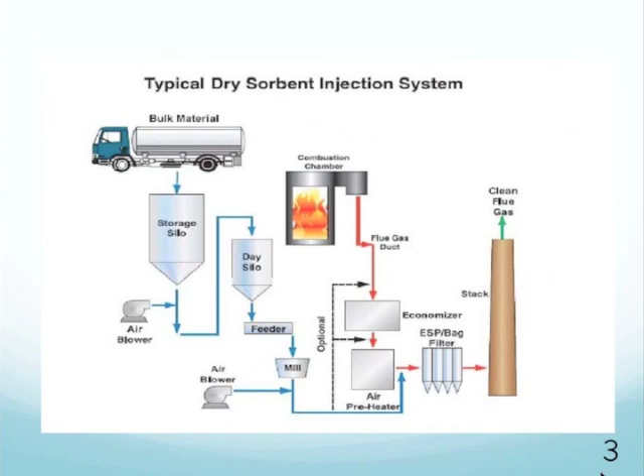As we will discuss later, you could inject the sorbent at one of several locations. Typically it is after the economizer, but it could be before the economizer, after the economizer, or after the air preheater, and before the particulate control device, which in this case is shown as an ESP or a bag filter or bag house. After everything, the clean gases go up the stack.

So here we want to show a little more detail, mainly making the point that the injection system can be fairly sophisticated, and would need to be fairly sophisticated depending on the sorbent that one is thinking of injecting.

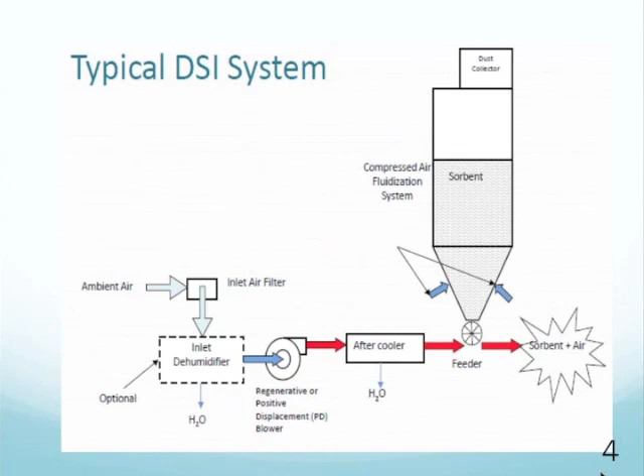You might need air conditioning of some sort. I show an inlet dehumidifier, for example, to take care of the moisture that may be in the ambient air, and you have to properly account for not introducing too much moisture for reasons we'll discuss in a minute. You might need to control the temperature also of the injecting gas and the injectant gas before it goes into the actual point of injection. We'll get into some of these details as to why they're important in a little bit.

I'll give you an example here. If you want to remove 1 pound of sulfur dioxide from the gas, and you're using Trona, you need about 2.4 pounds of Trona to theoretically remove the sulfur dioxide, assuming the chemical reactions are all complete and assuming you have perfect mixing and all the reactions you would like to occur. So you need about 2.4 pounds for each pound of sulfur dioxide, and that would correspond to a normalized stoichiometric ratio of 1.

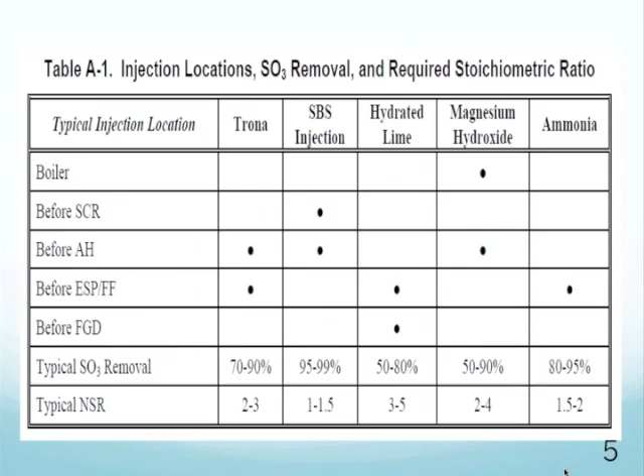So if you want to get the higher efficiencies of sulfur dioxide removal, you cannot get that with simply adding the theoretical amount. You need to do more than that, you need excess sorbent. So when you're talking about an NSR of 2 to 3, or 1, or 1.5, or some other multiple, it simply means that many times greater than the theoretical amount I just mentioned. The amount of sorbent you need to inject is going to be a function of variables we'll discuss. But you'll see the term NSR, and I just wanted to spend a few minutes clarifying what that term really means in this context.

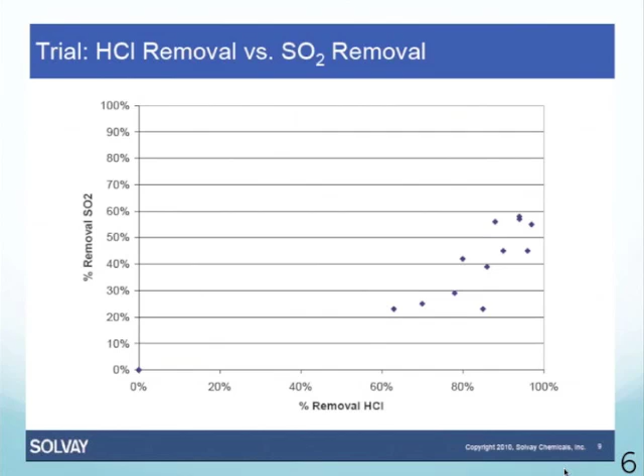Here I wanted to show a historical slide. I mentioned that the technology, at least in historical terms, was required for or used for HCl, and I wanted to show this cross chart of HCl removal versus SO2 removal, because generally these technologies do better on acid gases and SO3 than they do on SO2. What this chart shows is, while you could get 60, 70, 80, 90, close to 100%, or 99%, or 98% removal of HCl, you have a harder time for the same amount of Trona getting those sorts of high levels of SO2 removal. So SO2 removal will lag for a number of reasons, including how the chemistry works, how the mixing works, how the contact time works, how the residence time works, and so on.

I'm not going to spend much detail on slides like this, except to show that if you're considering the grand scheme of SO2 removal and you've already ruled out things like dry or wet scrubbers, and you're seriously considering dry sorbent injection, there are decision trees you have to navigate as to what type of sorbent, and later we'll see how that sorbent should be processed. For our purposes, we're talking about SO2 removal applications that exceed 50%, whether to meet EPA's MATS rule or to deal with reducing SO2 for other purposes like National Ambient Air Quality Standards.

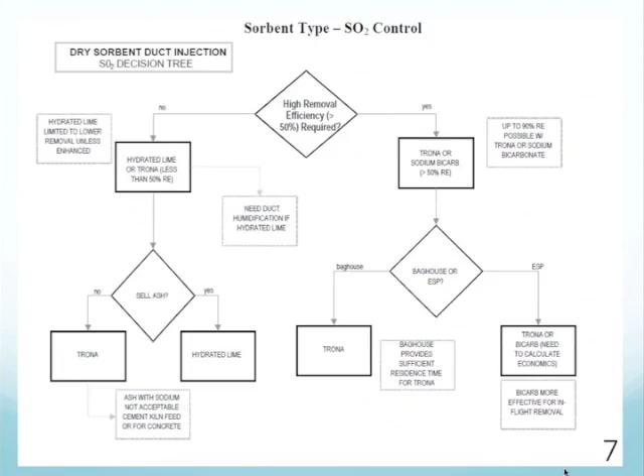If you look at that, calcium-based injectants such as hydrated lime are not favored. Instead, you want sodium-based injectants like Trona or sodium bicarbonate — that was the SBS in the previous table. So I'm going to focus this presentation on Trona as an example. That happens to be one of the more common sorbents under consideration for a number of reasons, including that it is cheaper than SBS. We'll talk about cost a little later.

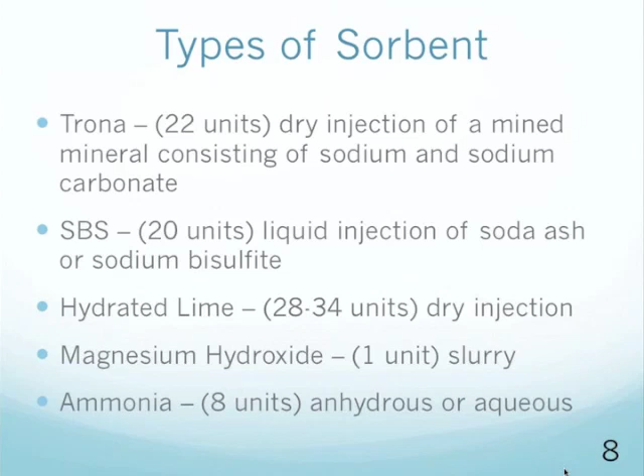On Trona, the actual name is sodium sesquicarbonate, and you can see the chemical formula there. It's a combination of sodium carbonate and bicarbonate, and it's hydrated. It is a naturally occurring mineral, and in the U.S. we have large deposits. There's some in California, actually near a place called Trona, near Bakersfield, but the bulk of the deposit is in the Green River Basin in Wyoming, coincidentally not too far from the Powder River Basin where we get a lot of our low sulfur coal.

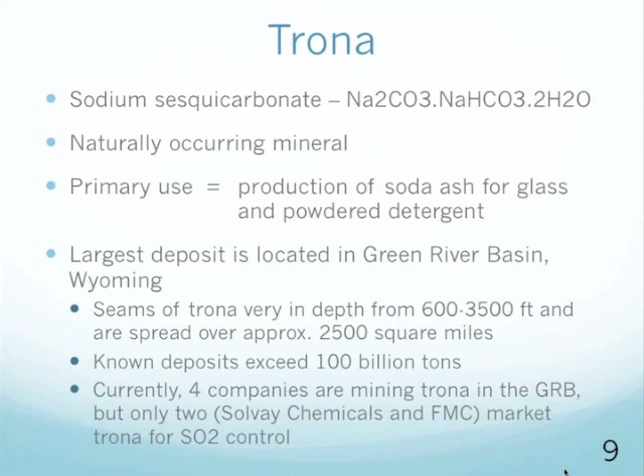It's a very large geologic formation with known deposits exceeding 100 billion tons of Trona. Various companies, four in particular, are mining it. Let's go to the next slide to get an idea of the location.

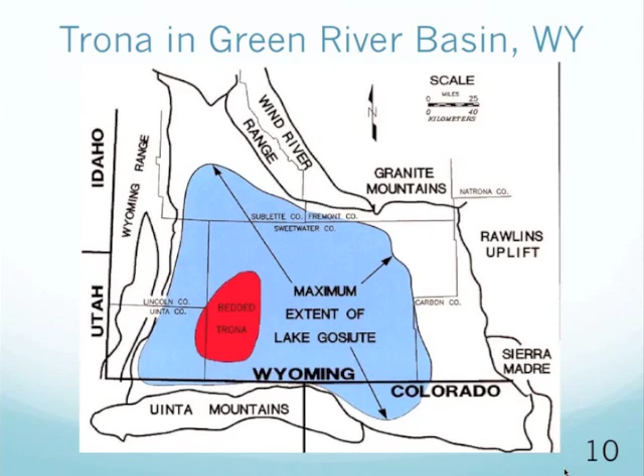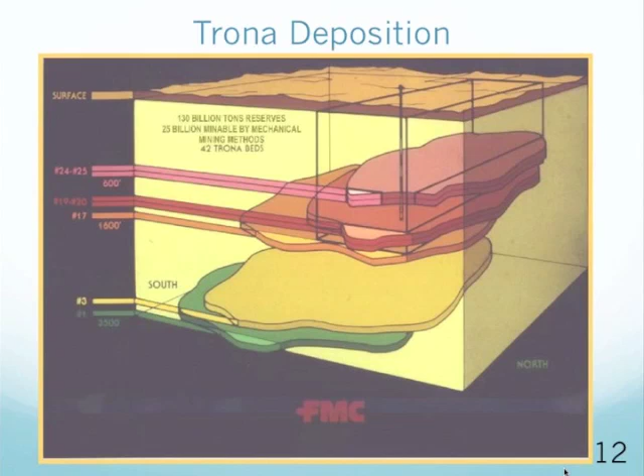I don't want to spend a lot of time on the detailed chemistry except to note a few things. The sodium-based reactions are our focus right now. There's a parallel set of calcium reactions I note here in case somebody selects hydrated lime or other sorbents I mentioned previously. But with the sodium-based reactions, you're essentially doing the same thing — substituting to create sulfates by displacing the carbonates in your injected sorbent.

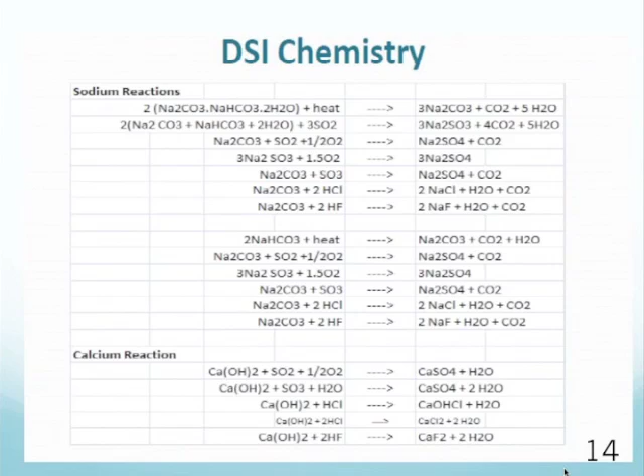If you look to the right-hand side, you'll see that what started out as sodium carbonate or sodium bicarbonate essentially ends up as sodium sulfate, SO4. One key thing to remember, a byproduct of this process as with many other desulfurization processes, is that you will produce carbon dioxide gas — you can see CO2 as a product on the right-hand side in many cases. When you inject the dry sorbent like Trona or SBC, or some combination of the two, you will produce CO2, over and above the amount normally produced in the combustion process if you're burning coal.

The Trona that is received is transported by rail from the Green River Basin, typically in 100-ton rail cars, to the point of application. You need a size that can be blown or injected into these various locations I spoke about earlier, and the sizing affects the utilization of the reagent.

The finer you grind the Trona particles, the better utilization you get, and in some ways you will lower that NSR ratio, meaning you need less excess quantity of the reagent than if you did not size it properly. So most Trona is sized or milled down to smaller particle sizes at the plant site, because that improves utilization, and using less of it reduces waste.

But there is a cost to further milling, and there is a trade-off. We're talking about sizes anywhere from 10, 15, 20, 25, up to 35 microns on average for the median particle size that gets injected and carried by conditioned air into the exhaust gas stream.

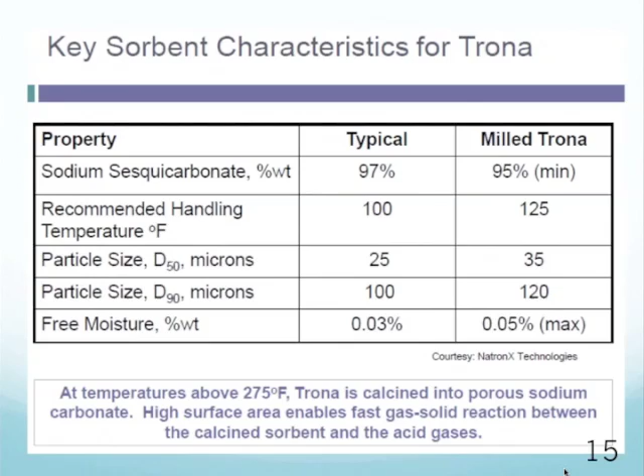Now I want to spend a few minutes on the location of injection in more detail. The location depends in some ways on temperature, which is a function of the sorbent. With Trona, it becomes less effective once the temperature falls below a certain threshold, roughly 290 to 300 degrees Fahrenheit. So the point of injection should be at temperatures significantly greater than that, because otherwise the chemical reactions won't be as effective and you won't get much utilization of the injected Trona.

The temperature profile of the exhaust gases as they leave the boiler and economizer, go to the air preheater, and then move on to the baghouse, is important in deciding where to do the injection. You must inject before the particulate control device -- you cannot do it after unless you have a secondary collector. If you have one main particulate collection device, injection has to happen before it, because the Trona particles that have absorbed SO2 must be captured as part of the baghouse dust.

The popular locations are either the economizer outlet, which is the same as the air preheater inlet, or after the air preheater outlet and before the particulate control device. In less frequent cases, it's also injected before the economizer.

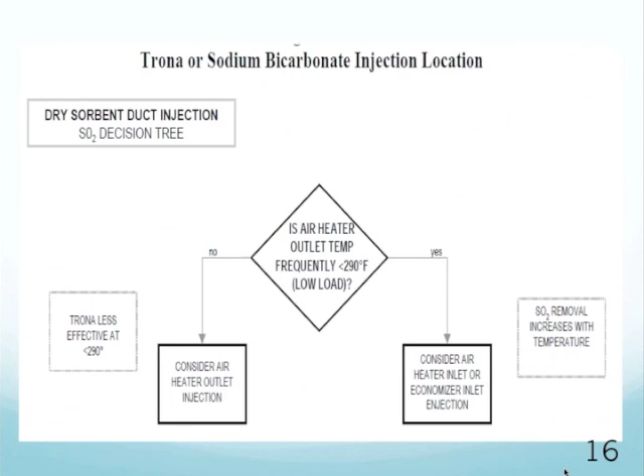Now, talking about milling, or essentially size reduction -- you typically have a grinder, pulverizer, or milling machine at the site where the received Trona is ground into the appropriate size and then put back into the day hopper or into the injector directly. Some of this depends on how big the facility is, because the cost differential and utilization economics depend on the scale.

A rule of thumb is 3,000 pounds an hour -- a fairly significant injection rate. At that point it might be more effective to take on the capital costs of milling machines and the operating costs for milling, to justify the improved utilization and therefore the lesser quantities you'd have to handle.

But if you have a large installation -- and by large I mean extremely large, like those of you who saw the announcement about AEP's Rockport facility, a 2-unit facility with 1,300 megawatts at each unit -- that's probably the biggest installation DSI has been slated for, and we can talk more about that in Q&A. But you will almost certainly consider milling if you're going to use Trona.

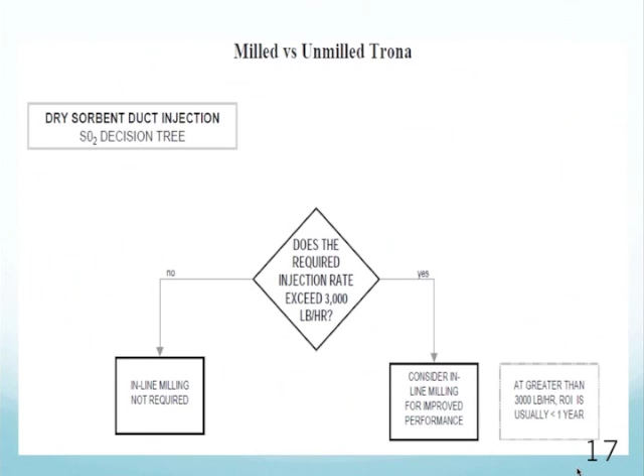What happens when you inject these Trona particles into the hot gas stream? What happens is they essentially bubble up. The surface area increases, and you get this popcorn effect.

And that's what is shown here, is this increase in surface area as a function of temperature. You want that surface area increase because that is what helps provide the surface area for the SO2 to adsorb and then react with for the chemistry to be effective.

So this shows that to get effective maximum utilization, you really want to be in the 400 to 600 degree temperature range, because anything below that, at 100, 200, 300 degrees, the surface areas are not very high. And if you get to very high temperature on the other side, the Trona essentially sinters and chemically transforms, and you lose utilization.

So there is a sort of sweet spot in the temperature window where you want the injection, and that is really what drives that injection decision, in addition to the practical considerations of collecting it before the bag house and so on. I wanted to give you this to give you a better understanding of why the injection point is typically where it's at. We can go to the next slide.

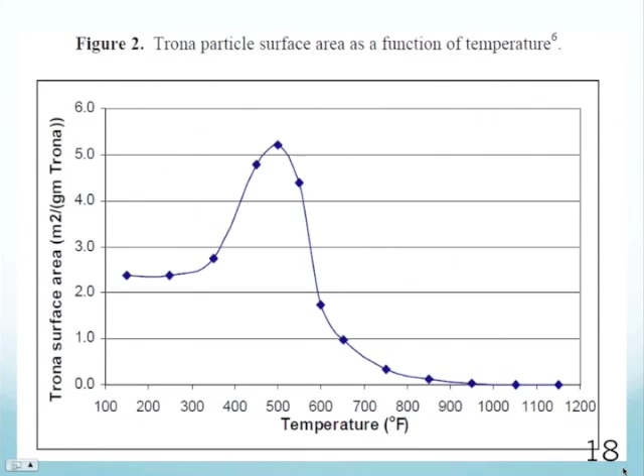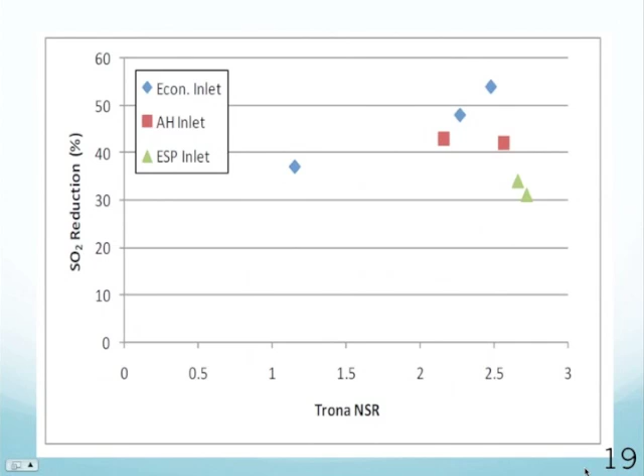We will see that in specific installations and under specific conditions, you can get higher SO2 removals. In other words, 60% is not the maximum by any means, but it does take a lot of Trona, a lot of sorbent, and we'll see that in subsequent slides. Let's go to the next one.

This is another set of trials, and here we see that at the very high end, at an NSR ratio of 3.5 - that is 3.5 times the theoretical - if you remember the 2.4 number I mentioned, that's 2.4 pounds for every pound of SO2 removed, 3.5 times that works out to close to 10 pounds of Trona for every pound of SO2 you're removing.

And of course, at the right injection point, you're now getting a reduction, in this set of trials, that is greater than 85, close to 90%, or even in the mid 90%. But that is unusual - that is a lot of Trona and a lot of material handling. You see the sensitivity of the NSR ratio as well as the injection point and injection strategy in terms of removal efficiency.

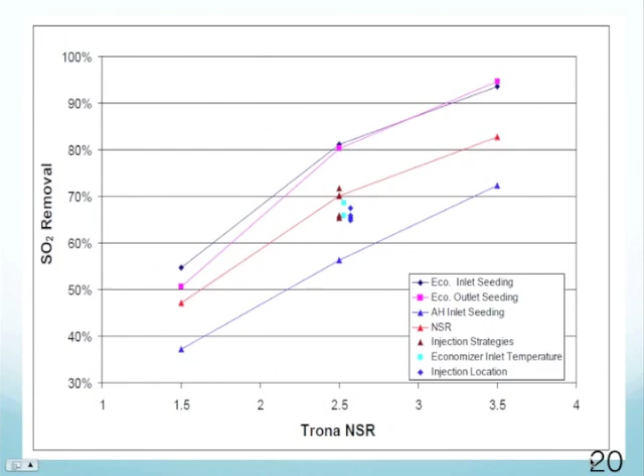So you can have a wide range, and the operating parameters and the cost will really dictate what you can achieve. You will never get the 98 or 99% efficiencies that you might get with a wet scrubber. It is difficult to consistently get 95% like you might get with a dry scrubber, but it's a matter of how much, and how overwhelming you can make the injection in terms of getting the mixing with the SO2. Let's go to the next slide.

I mentioned way back in the beginning that the conditioning of the air is an important factor, and I show that in this slide from a vendor. Conditioning in this case means dehumidification as well as some degree of temperature control. We can look at this chart a couple of different ways. It shows the non-conditioned air, just ambient air, in blue, and the conditioned air in the red or brown dots.

Let's take for a given amount of expected SO2 reduction, say 60%, and look across the chart. You can see that you get that same degree of SO2 reduction, but at a lot lower NSR ratio. That means you need less material if you have conditioned air than if you don't.

The other way to look at it is, for a given NSR, say 1.5, you draw a vertical line. For a given amount of material, you will get essentially different levels of SO2 reduction with conditioned and non-conditioned air. You get better reduction with conditioned air, or you get the same reduction for less material. Either way, conditioning helps.

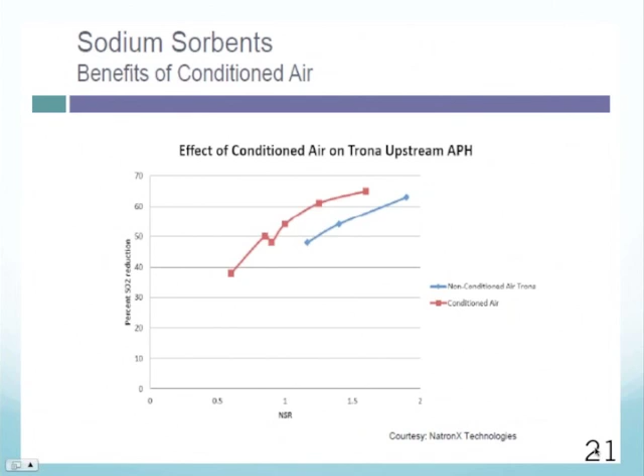Of course, it is also an added cost because you have to dehumidify and maybe keep the temperature properly controlled. We'll see conditioning has yet another effect that I'm hoping is on the very next slide. Let's go to that one.

This is taken from actual data, and it shows one other thing: these hydrates, basically carbonates and bicarbonates, if you don't condition the air, can actually pick up moisture from the ambient air and start creating conveyance problems. They can block lines and create significant fouling in the equipment and handling system. So some amount of conditioning is essential just to make sure your system doesn't plug up.

What you see here, to dramatically illustrate that, is on the y-axis, blower pressure. Imagine there's a fan or blower blowing the Trona into the actual flue gases to be treated. The higher blower pressure simply means you're reaching more resistance, encountering more fouling. This is showing the effect.

Runs A and B at the very left use ambient air, with a reasonable amount of carbon dioxide typically in the atmosphere—400 ppm is the typical atmospheric concentration of CO2. You can see very quickly, within a few days, just the third day, the blower pressure starts to go really high, meaning you're starting to get significant blocking.

You reduce the CO2 value as part of your conditioning, dropping out the CO2 a little along with the moisture, and you're able to go much longer, maybe 10, 12, 14 days, before blower pressure rises again. Finally, if you add an air cooler and more sophisticated conditioning, you pretty much stay at a low blower pressure for very long—in this case for a couple of months—without fouling problems.

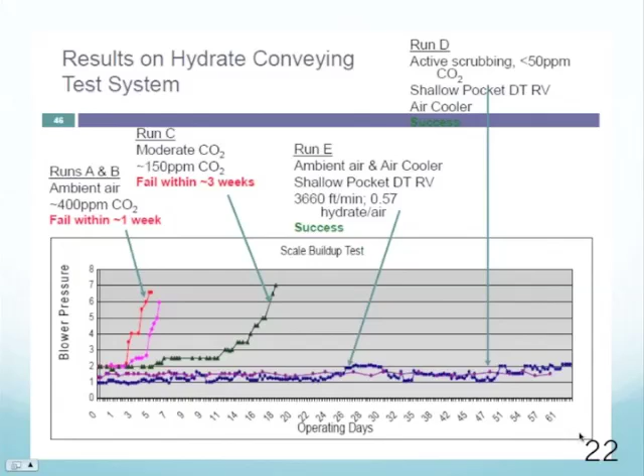The practical need—I mention all this because it seems like a very simple installation where you just bring in some dust and blow it into an airstream, and voila, you have the reduction you want. But in reality, the operating issues are fairly important and will drive a lot of decisions, and have to be paid close attention to if you want to get this technology working, especially if you have to sustain a claim of high efficiency over a long duration. Let's go to the next slide.

Some more challenges: we were just talking about the plugging and caking issues. They can dehydrate in the conveying system, meaning you're losing water, and that water then becomes available to agglomerate and further worsen the caking problem. The way around that is you really have to minimize and properly control temperature, CO2 concentration, and moisture concentration throughout the entire stream. That's the key takeaway for designing a handling system that will go a long time without causing problems. Next slide.

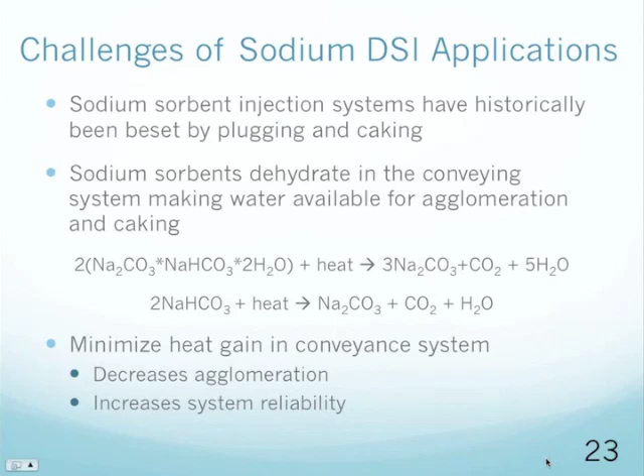Some more important concerns that need to be fleshed out with this technology: first, I'm going to mention ash sales. In many cases, this is not the bottom ash—imagine the ash affected here is the fly ash, captured by the baghouse or ESP. That fly ash is now impacted with sodium compounds, the sodium sulfates and bisulfates created, as we saw in those chemical reactions. So that changed ash may not be suitable for whatever useful application the untreated ash was previously used for. You have to do an assessment. Facilities considering DSI, especially if they have ash sales, will definitely be looking at that and seeing whether it's still possible or not.

We will come to in the next slide a different concern on ash sales, which is if you don't sell the ash, you're landfilling it most likely or disposing of it, and that implication has to also be looked at. We'll get to that.

There is the fact that fly ash created with sodium compounds has increased solubility for several metals, particularly arsenic and to a certain extent selenium. So if you had a standard process without the sodium compound injection, without Trona injection or sodium bicarbonate injection, and you're landfilling the ash without any kind of leachate collection system or liner system—essentially an unlined or old landfill—then you have to be extremely concerned about adding these sodium compounds and significantly increasing the leachability of certain metal constituents in the ash.

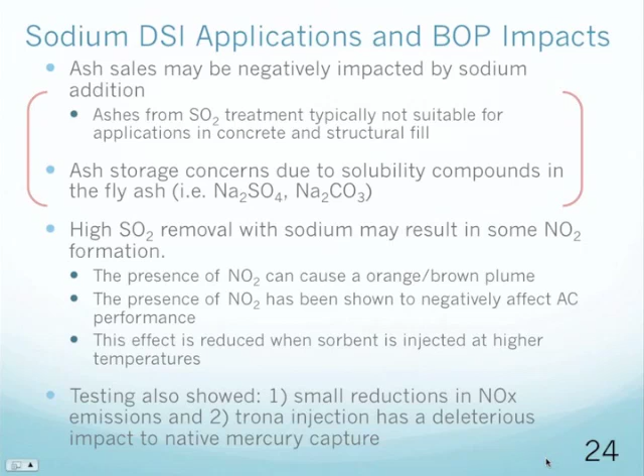And in some cases, this dry sorbent injection is likely to occur alongside other types of injection, like ACI—activated carbon injection—for mercury control. A facility may be injecting ACI roughly in the same place to capture that carbon ahead of their baghouse or ESP. So the cross-sensitivity of both of these injections has to be kept in mind. Some studies have shown a reduction in the ability of ACI to capture mercury when you simultaneously start adding Trona or other DSI reagents into the same mix.

Let's go to the next slide here.

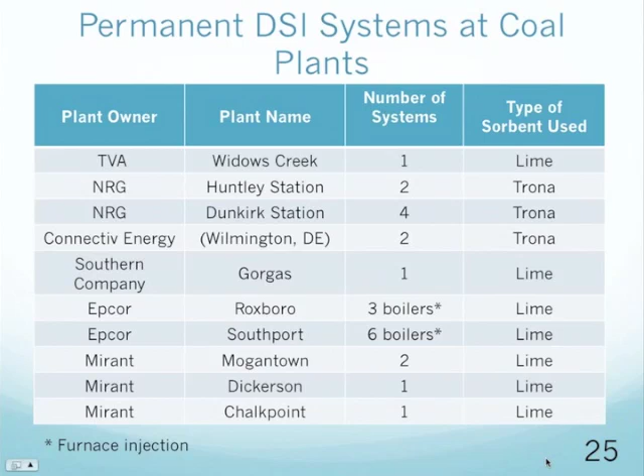I think we're getting close to the end, so I had a few slides showing that lots of people have tried lots of different reagents. There are several operating ones in many companies right now based on Trona, and based on lime. The earlier installations were really focused on acid gases, so they tend to be more calcium-based, like the lime shown on this chart. The newer ones are more focused on SO2, and therefore you have Trona.

Let's go to another slide or two with more lists of plants that are either evaluating or testing. Various vendors with DSI have mobile platforms they can bring to a facility and do a longer-term, maybe 6 to 8 week test, looking at different parametric variations to find enough information to do decent cost projections for capital and operating costs for these systems on a permanent basis. So we see a lot of that activity going on.

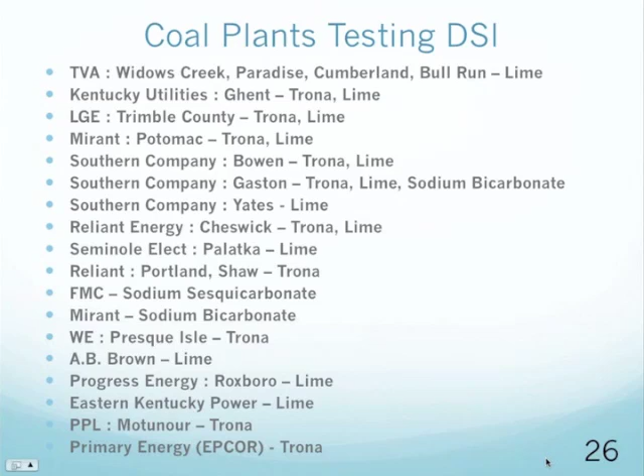But I'm going to reiterate that in addition to the CO2 increases, which are now captured by the permitting process, the impact on NOx and the cross impact on mercury have to be looked at from an air quality standpoint. And an even bigger concern is the impact on the changed nature of the ash, the fly ash, as a result of DSI, and its longer-term impact on storage stability and potential leaching, especially if it is put in unlined landfills. That really has to be assessed as part of an overall evaluation of this technology.